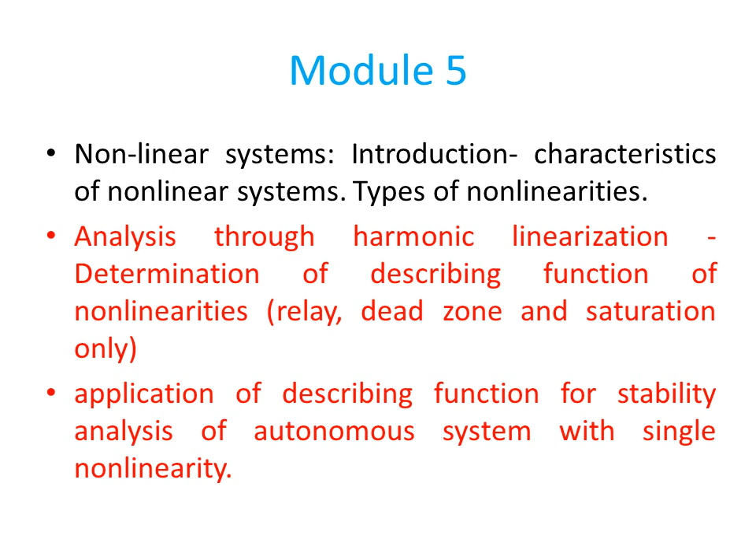The basic difference between a linear and a nonlinear system is that the superposition theorem cannot be applied for nonlinear systems. To explain the superposition theorem, consider a system with a transfer function G(s). If the input is x1, the output is y1. To the same system, if you apply x2 as input, then the output is y2. Next, we apply x1 plus x2 as input. If the response we get is y1 plus y2, then we can say that the given system is linear. This is the superposition theorem.

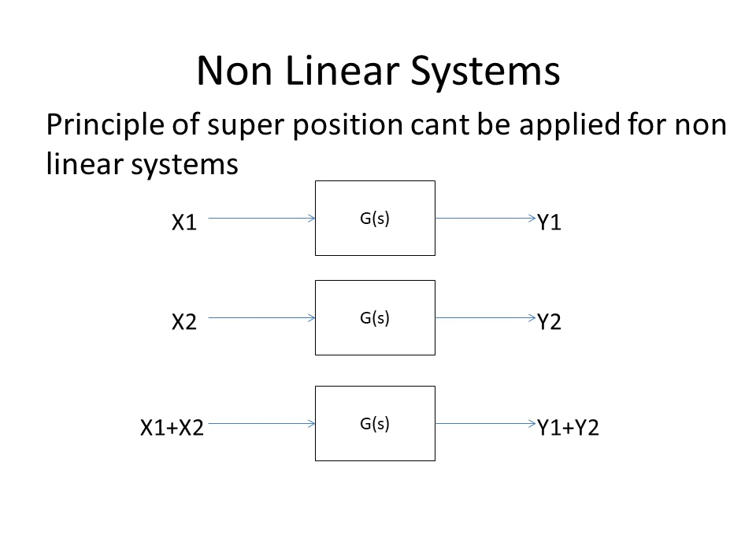To verify the superposition theorem, consider a system y = ax + b dx/dt. We know that for x = x1 + x2, if y = y1 + y2, the system is linear. For getting this, put x = x1 and x2. The corresponding outputs are y1 and y2. Then substitute x = x1 + x2. The response is y1 + y2. So we can confirm that the given system is linear using the superposition theorem.

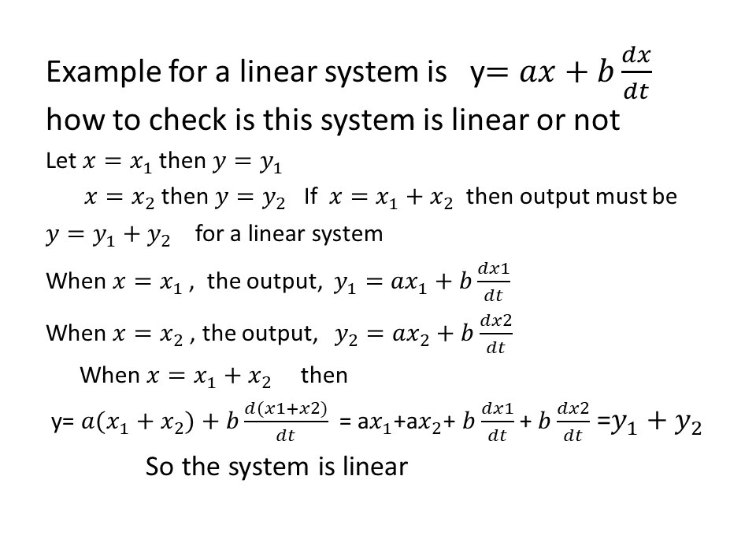Introduction to nonlinear systems. Consider a spring. When a spring is loaded, it gets extended. As the load is increasing, the force-displacement curve is linear within the working range. When the load increases beyond this maximum working range, the spring starts yielding and becomes permanently deformed. That is, the spring behaves linearly over its working range, and beyond this range, it acts as nonlinear.

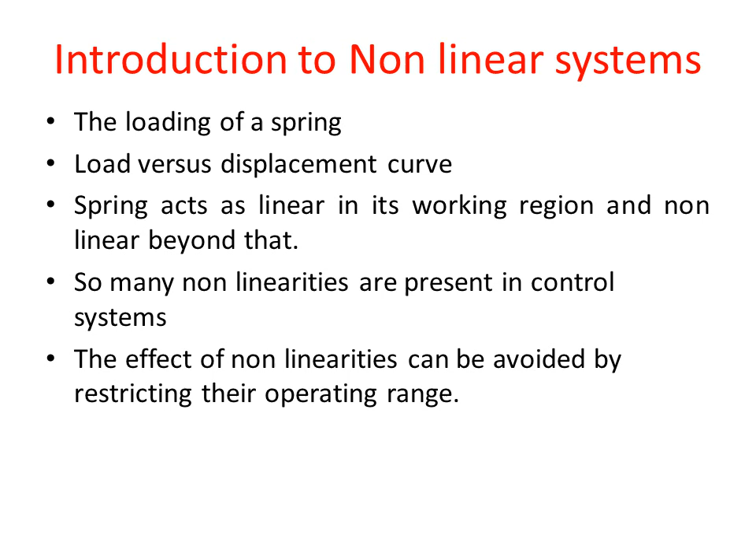So, in all control systems, there will always be some nonlinearity due to saturation, dead zone, friction, backlash, inertia, etc. The effect of all these nonlinear components can be avoided by restricting the operation of the component over a limited range, and up to this limited range the system acts as linear, and after that the system works as nonlinear. Thus the characteristics of all these components may be considered as linear up to some working range, and after this range the system works as nonlinear.

Next we can discuss different nonlinearities. Nonlinearities can be classified into two, incidental and intentional nonlinearities. So what does incidental mean? These types of nonlinearities are inherently present in the system. That is, saturation, dead zone, friction, backlash, etc. are examples of incidental nonlinearities. The next one is intentional nonlinearity. These are deliberately inserted in the system to modify system characteristics. An example is the relay. Next we can discuss them one by one.

First is the saturation. In the saturation nonlinearity, the output is proportional to input up to a particular value, and after this value, when input is increasing, output remains constant. So up to that particular value, the operation is linear, and after that the output is constant.

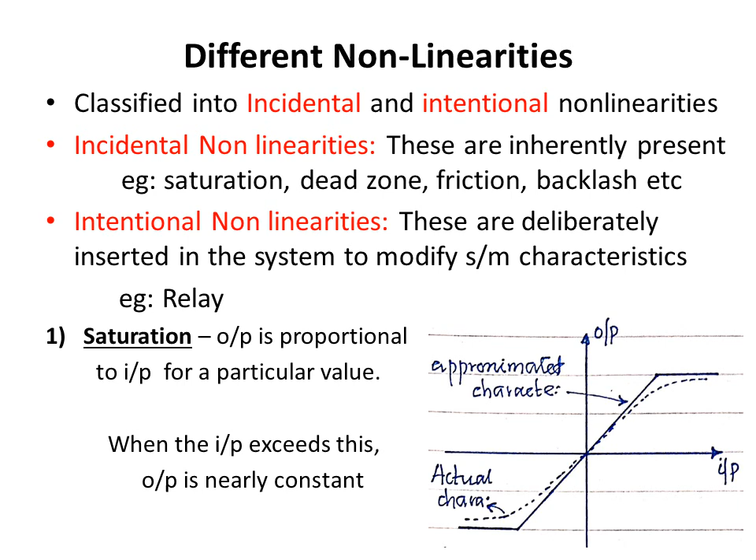Next one is the dead zone. The dead zone is a region in which the output is 0 for a given input. If the input amplitude is less than some small value, then there will be no output. The region in which the output is 0 is called the dead zone. When the input is increased beyond this dead zone value, the output is linear. The first figure shows a dead zone and the next one is a dead zone with saturation.

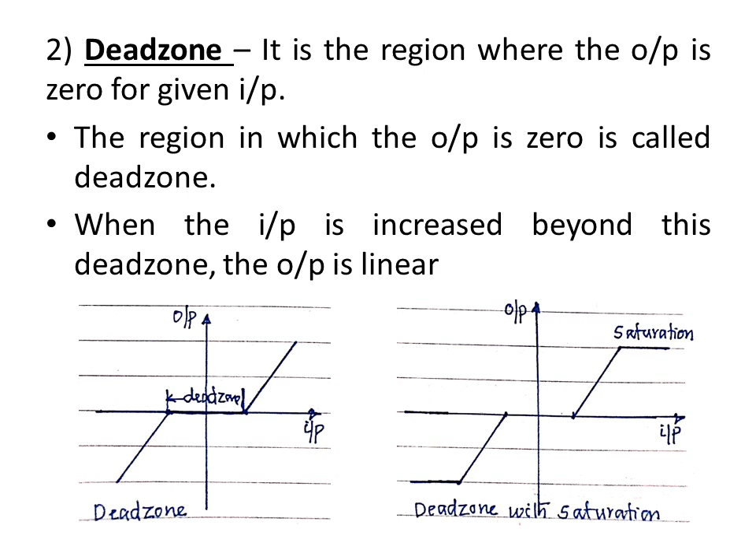Third one is relays. Relays are commonly used in industry for controlling a large amount of power to a circuit by using a very small amount of power for operating the relay energizing coil. The relays are thus very large scale power amplifiers.

The input output characteristics of the relays can be of different types depending on the nature of the relay. There are so many types of relays available now. The first one is the ideal relay. In ideal relay, the output switches between plus M or minus M depending on whether the input is positive or negative. If the input is positive, it switches to plus M, and if negative, it switches to minus M.

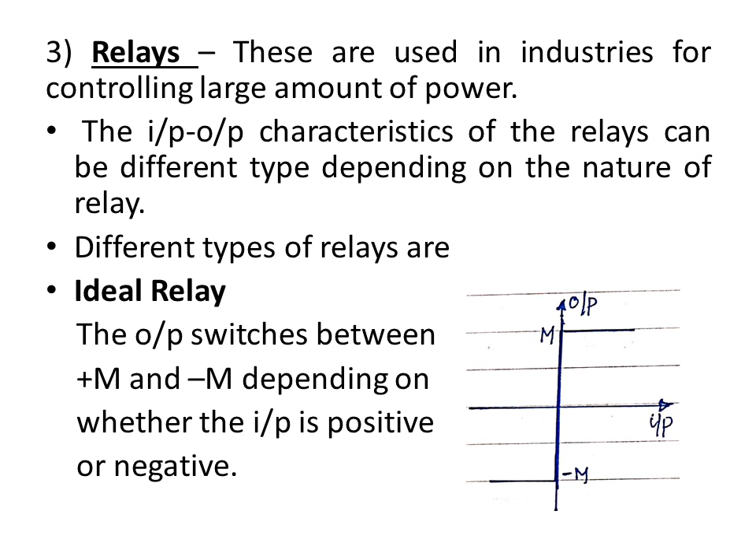Next is relay with a dead zone. In this type of relay, when input is greater than A, the output switches to plus M for a positive cycle, and for a negative cycle it switches to minus M. So the region in between A and minus A is a dead zone.

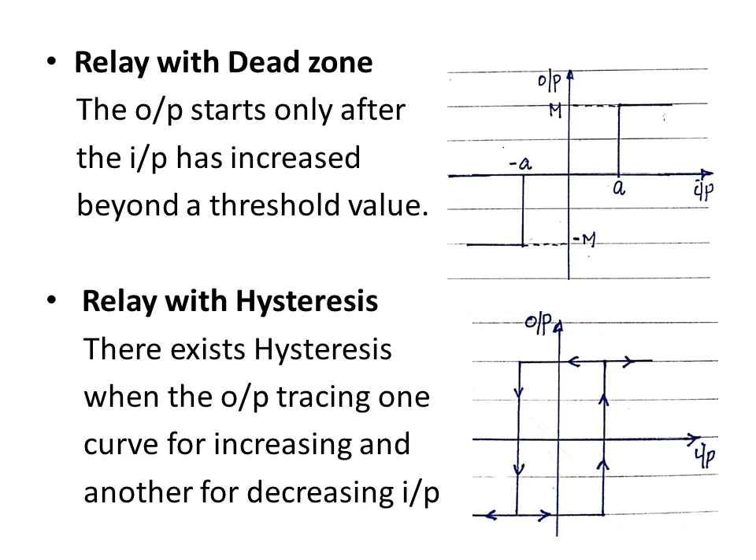Next is different types of springs. I have already explained about springs, and input output characteristics will be different for different types of springs. Normally there are three types of springs: linear, hard and soft springs. In linear spring, the input output relationship is linear, and we can explain it with a mathematical relation f(t) = k x(t), where k is the stiffness of the spring, f(t) is the applied force and x(t) is the displacement.

And in the case of hard spring, if the elastic limit is exceeded, the input output characteristics can be explained as f(t) = k1 x(t) + k2 x³(t), and now the relation becomes nonlinear. And similarly for soft spring, the input output can be given by f(t) = k1 x(t) − k3 x³(t).

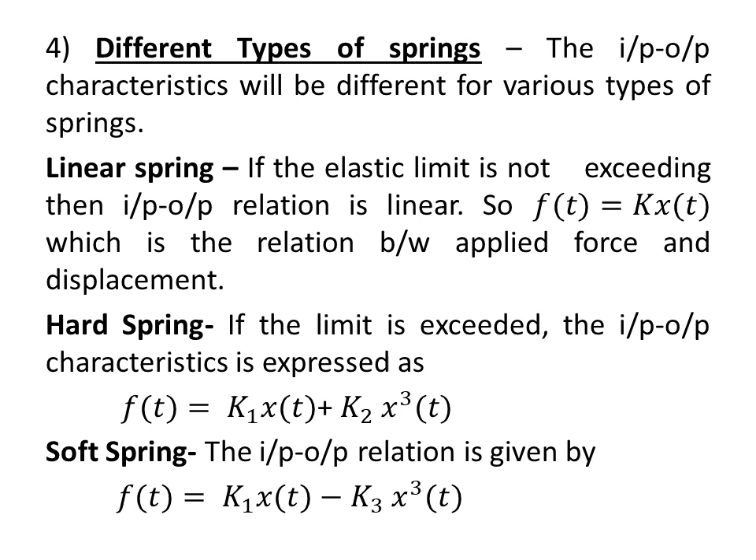The figure shows the input output characteristics of all springs. In the middle we can see the linear spring. Above is a hard spring, below is a soft spring. We can see that the sign is positive for hard spring and negative for soft spring.

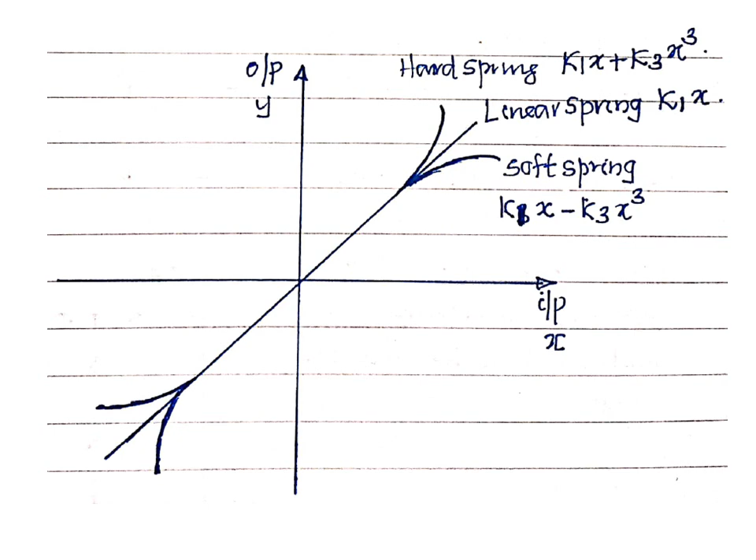Next is friction. Friction exists in any system when there is relative motion between contacting surfaces. The different types of friction are viscous friction, Coulomb friction and stiction. First of all, viscous friction: this type of friction is linear, and the frictional force is proportional to the relative velocity of the sliding surfaces. So the input output relation is shown in the graph. The curve is linear.

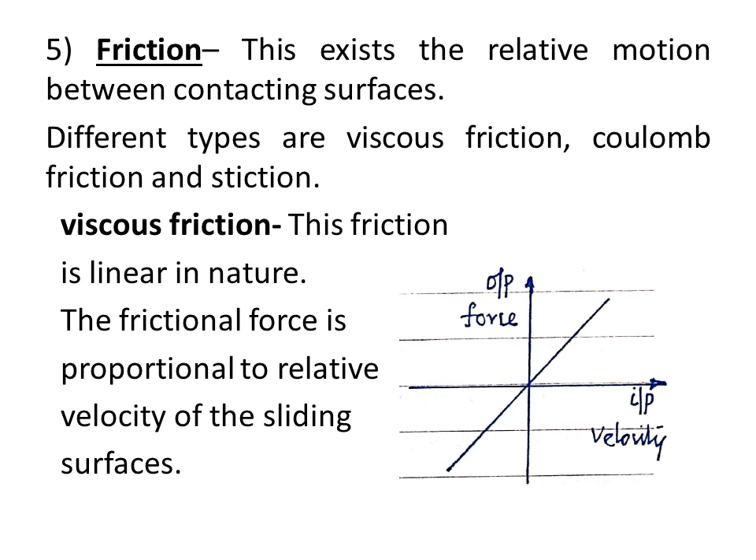The Coulomb friction and stiction are nonlinear frictions. The Coulomb friction offers a constant retarding force only when the motion is initiating. Due to interlocking of surface irregularities, more force is required to move an object from rest than to maintain it in motion, which is the stiction. Hence, the stiction force is always greater than Coulomb friction.